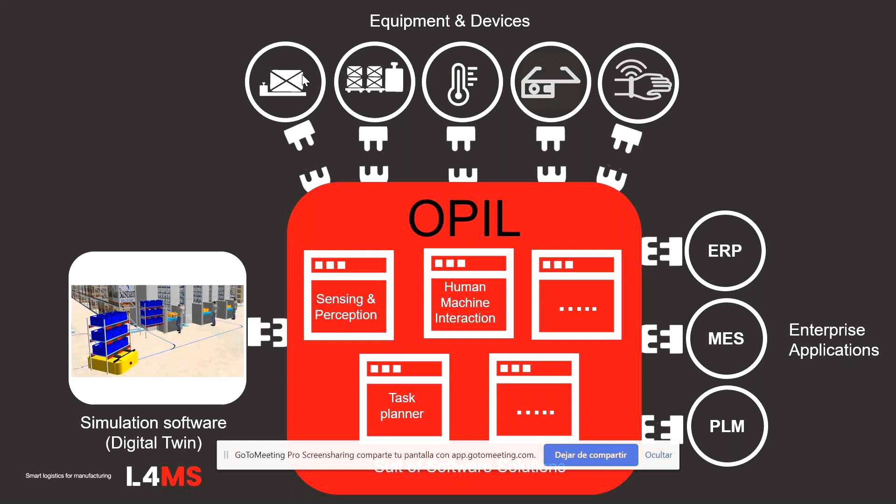So, in a nutshell, this is the main idea of OPIL. And the idea of OPIL, actually the level of development, is that this kind of IT applications and devices can be very easily, with a very low overhead, connected to OPIL and enable the communication that is so handy at the moment of implementing a logistics system.

Using OPIL - basically OPIL can be used for two extreme scenarios and all the scenarios in between. The first scenario is what we call the planning phase. The planning phase is when you are considering and studying how you are going to implement your AGV systems. So during the planning phase, you can use OPIL to make simulations, to design the layout of your material handling, to create the right routes, and also to set up the right schedules.

But we can also use OPIL during the execution phase. As you can see in the figure on your right, during the planning phase, we connect OPIL with our digital twin to test in a digital environment how the system would work. On the other hand, during the execution phase, we use OPIL to actually steer the different devices structuring your logistics system. So in this case, we can directly connect the devices and make sure that, for example, tasks provided by the MES system through the task planning module can steer your AGVs and so forth.

As we can support these two types of phases, and as the system is also very flexible, it enables easy communication between all of these applications and devices. Using OPIL can actually enable you in the continuous adaptation and reconfiguration of your logistics system. So whenever there are important changes in your factory, with OPIL you will have, at a very low overhead, the possibility to redesign your logistics system, test it, and implement it all over again. This makes the usage of this kind of automated logistics system much more flexible.

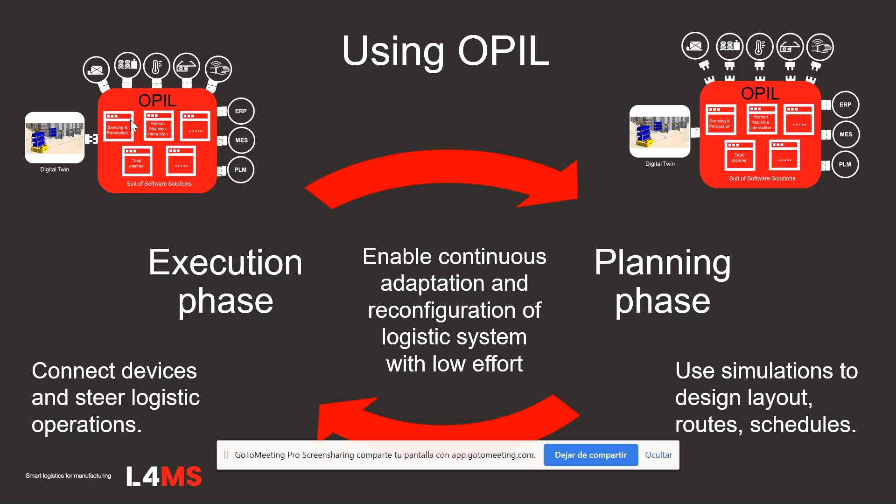So, which are the main consequences? Which are the main effects that OPIL could have for your factory? Well, there are many, but there are three I would like to focus on. The first one being interoperability. This is a word that has been on the podium already for some time in the context of Industry 4.0. It's interesting to know what it actually means. In this context, it means that the interfaces that OPIL provides enable communication between enterprise applications, factory equipment, and software solutions in a very easy way. So this is the thing that I have been pointing out during this presentation.

Secondly, interoperability allows you to have a minimum effort for connecting new devices to your logistics system. So if you would add a new AGV system to your factory, having OPIL, that would be something done with much lower effort than using the traditional way of implementing logistics.

And then finally, OPIL also helps in supporting planning the right routines to simulate and test them in virtual environments, meaning that you can virtually design and understand exactly how your factory will work before having to implement your solution physically. So these are the three main effects that OPIL has in terms of practical implementation in a factory.

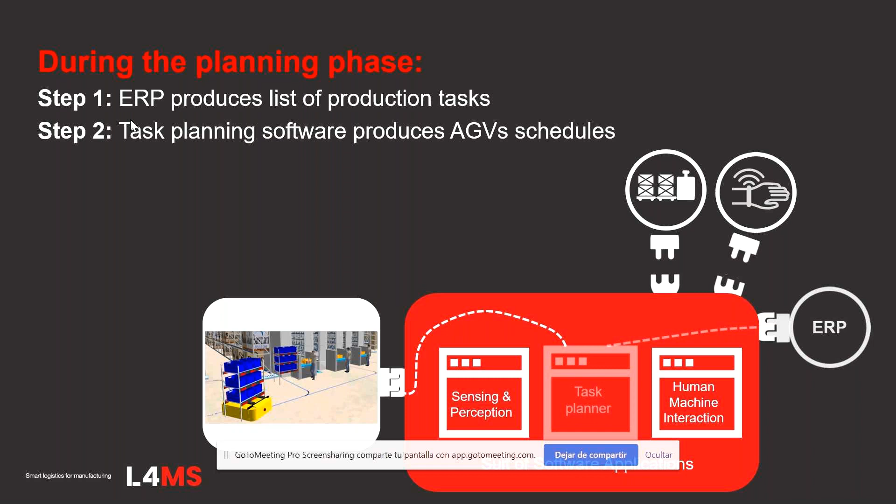So let's suppose during the planning phase that your ERP system produces a list of production tasks. These production tasks are sent to the planning software in OPIL, and the planning software in OPIL would produce AGV schedules for your factory. These AGV schedules then can be sent to the digital twin, the simulation software, to determine how they actually work and what is their efficiency.

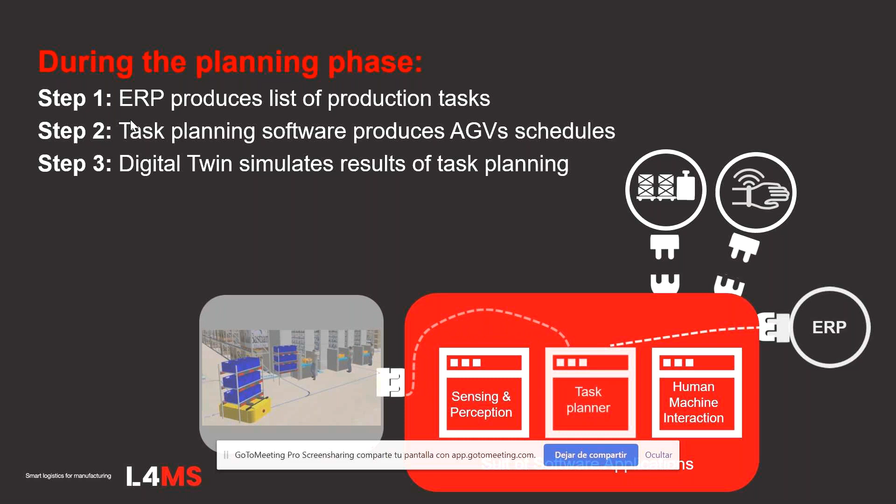Once you are happy with the solutions that you have obtained, then you can move to the execution phase. In the execution phase, we're no longer going to work with the simulation software, the digital twin. In this case, what we do is connect, for example, an AGV and a wearable. The AGV is one AGV that you're using for moving material in your factory, and you have a wearable that is used for tracking which task the AGV is actually doing at a given moment of time.

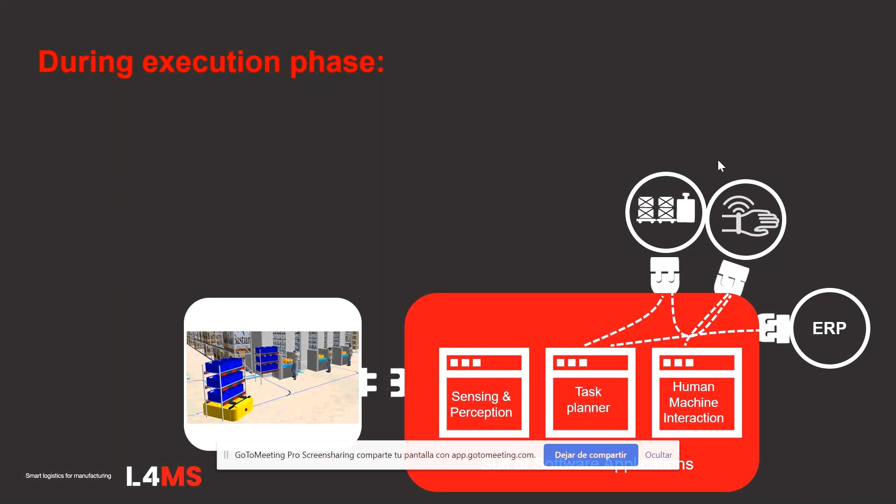Once wearables and track and trace are also connected, the task planning software of OPIL will steer the AGVs and the routines that they have to follow. It will also, through a monitoring interface, allow the humans that have the wearables to know what is going on with the AGV at a certain moment of time.

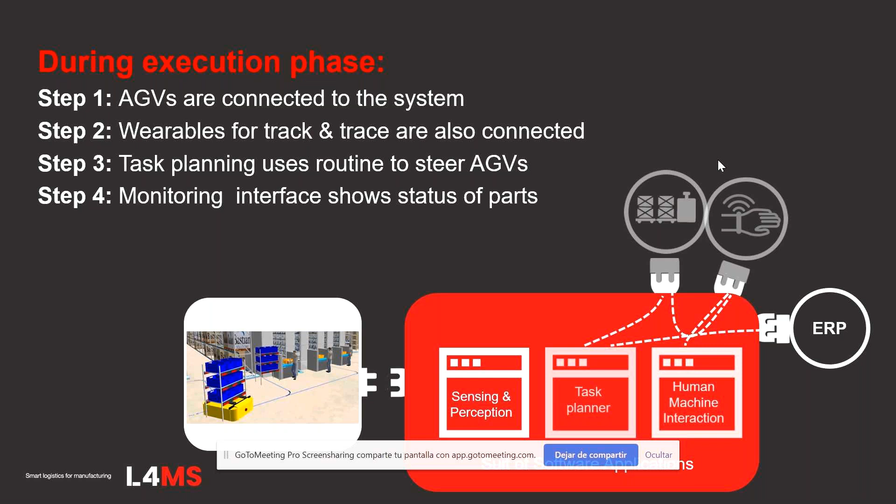Now, I hope that at this moment it's kind of clear what OPIL is, what the IoT platform we are developing is, and what effect it has on your factory. Just to recall again, it reduces the overhead and makes it much easier to create a system that can manage logistics in a flexible way.

But this presentation is also about the open call. The open call is a mechanism that we have available for providing funding to SMEs and mid-caps that are interested in implementing a logistics solution in their factory.

So let's take a look at the main concept. I would like to do that by first addressing the objectives that we have in our project L4MS in providing funding for creating this kind of project. We have basically three types of objectives.

The first objective that we have is that we want to have several pilots to show the industry the benefits of implementing this type of technology. We want these pilots to help us demonstrate that OPIL will drastically reduce the resources required for implementing an automated logistics solution, like, for example, implementing AGVs in your factory.

The second objective regards OPIL. We want to show different examples that demonstrate the functionality of OPIL, and address the different issues that can be targeted with OPIL. We also want to improve, based on user experience, the current state of this IoT platform, and see whether there's other functionality that should be incorporated in OPIL.

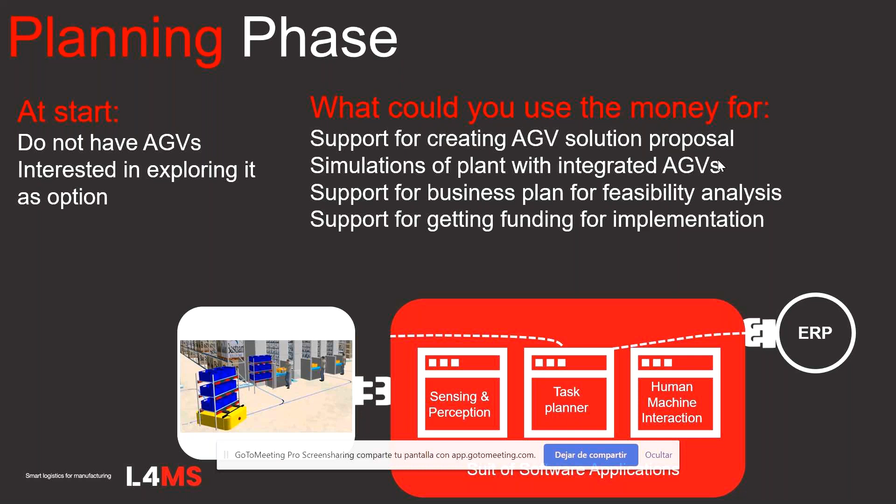So one first example is addressing the planning phase. Let's suppose that right now you do not have an AGV solution, but you are interested in exploring whether this is an option and whether it would really help you in improving the efficiency of your plant. If that is your case, you could use the money of an open call for a number of things. You can use it, for example, to get support for creating an AGV solution proposal. You can also get support for creating simulations of your plant that already integrate the AGVs. You can also get the money for helping you get a business plan to check whether it is really feasible for you to implement this, and also which are the long-term consequences for your factory. And then finally, we could also support you in getting funding from, for example, venture capitals, for really scaling up the implementation of the system.

Another example I am showing you here regards the execution phase. In this example, the starting state is different. In this case, you already have AGVs, but you're interested in seeing whether you can actually improve your system, and more importantly, whether you can make it more flexible and agile. So in that case, you could use, for example, the money of this open call to make plant simulations with integrated AGVs. You could also get it to support the attachment of your current AGVs to our OPIL system.

This would require some IT development. You could also use it to test the task planning software and see how it manages the AGVs you already have in plant. You can also use it to add track and trace functionality, and you can even use it to create and test some monitoring cockpits in your factory to help you deal with your material handling systems.

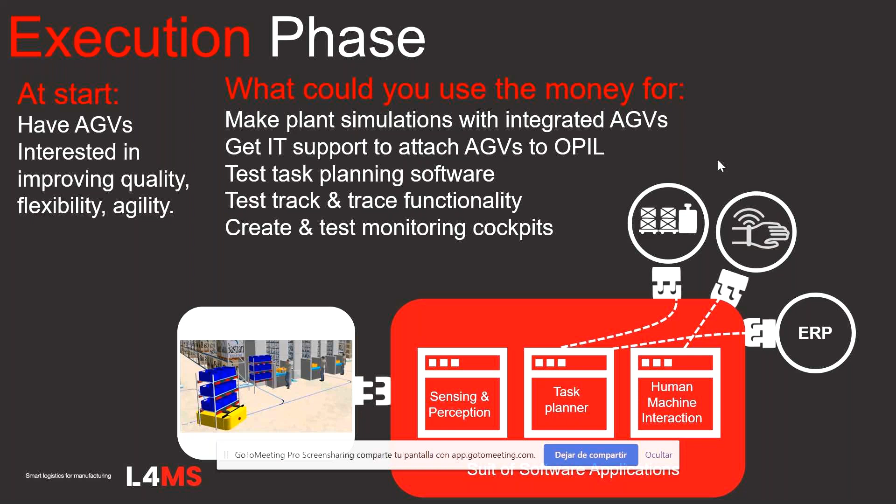Well, finally, you can of course think about combinations of both. So you can think on projects in which planning phase and execution phase are integrated, with the aim of making a logistic system that can continuously be adapted to new situations. So I hope that these examples give you an idea about what you can use the money for, and the type of things that we are expecting proposals to have.

Having said that, I would like to move now into the details of the open call, all right? And I'm going to do that by first giving you, in one simple slide, the main steps that you have to follow in order to set up your project proposal. So basically, there are three things you should do. The first thing is that you need to recognize your opportunity. So why is it handy for you to incorporate this kind of system?

And why is it, more importantly, why is it handy for you to submit a proposal for the open call?

The second thing you have to think about is the consortium that you are going to build for deploying this project. There might be other partners required to implement this. I will show them to you in a moment. And then finally, once you have recognized the opportunity and created a consortium, you will have to write the proposal, as I will also describe later in this presentation.